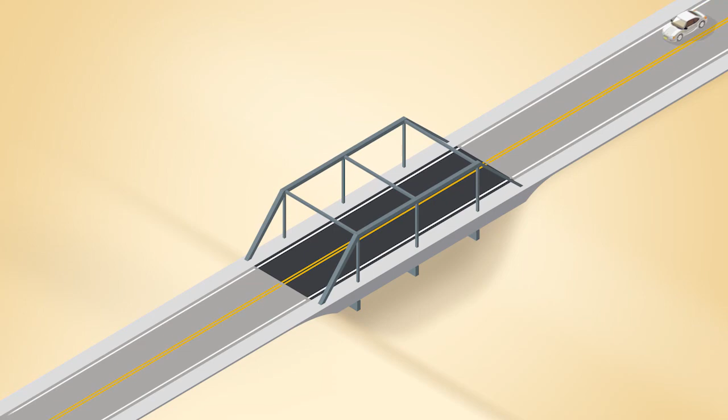As a matter of public safety and as a way of safeguarding vital transportation infrastructure, state and local law enforcement agencies enforce weight restrictions on trucks and heavy vehicles traveling public roads. Under normal conditions, vehicles over 40 tons are not permitted on interstate highways.

Additional restrictions apply based on the legal load combination, a function of vehicle weight and axle spacing. For example, 25 tons is the weight limit for a typical 3-axle truck on an interstate highway, while a typical semi-trailer's limit is 36 tons, and a 4-axle dump truck's is 27 tons. State and local laws may address the legal load combinations allowed on state and county roads by farm vehicles and other types of commercial trucks.

When the drivers of trucks operating within the legal weight limits cross a bridge, they are relying on the bridge owner, whether a federal agency, the State Department of Transportation, counties, or municipalities, to keep the bridge safe and available for their use. All of these bridge owners have critical tasks in common. They need to inspect the bridge for deterioration or damage, determine if changes in condition have reduced the bridge's structural capacity to safely carry legally permissible loads measured by its load rating, and notify the public of any weight restrictions.

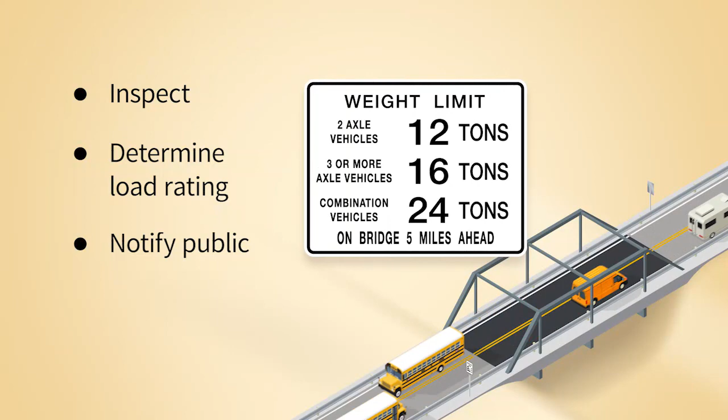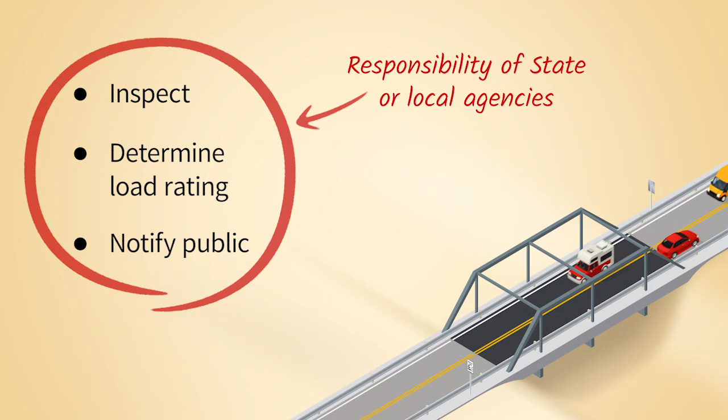The responsibility for restricting loads on local bridges may fall on state or local agencies, depending on agreements between each state and local governments it serves. Here, we will review how load ratings are determined and the best practices for posting truck weight restrictions.

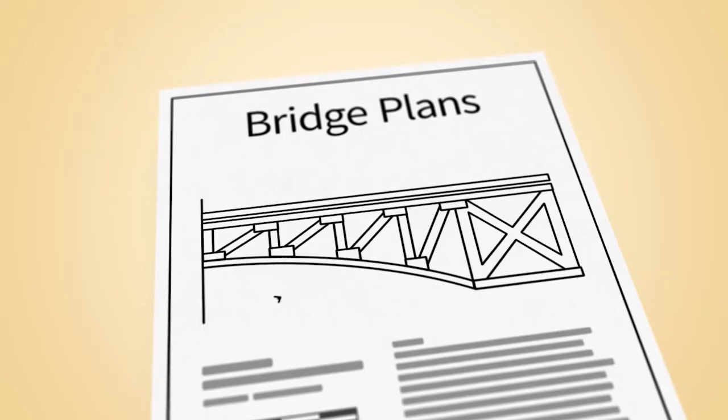Before a bridge or culvert is constructed, an engineer designs its structural elements to have capacity to meet anticipated use. After construction, and as part of every bridge owner's responsibility according to the National Bridge Inspection Standards, a bridge is inspected once every 2 years. The inspection report documents any deterioration or damage that might reduce capacity and may recommend an updated load rating analysis.

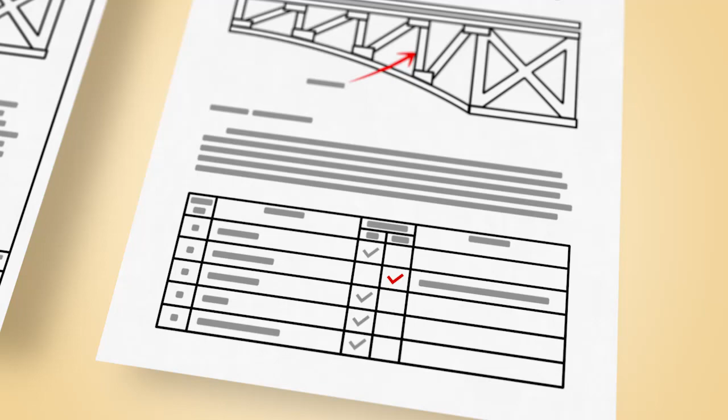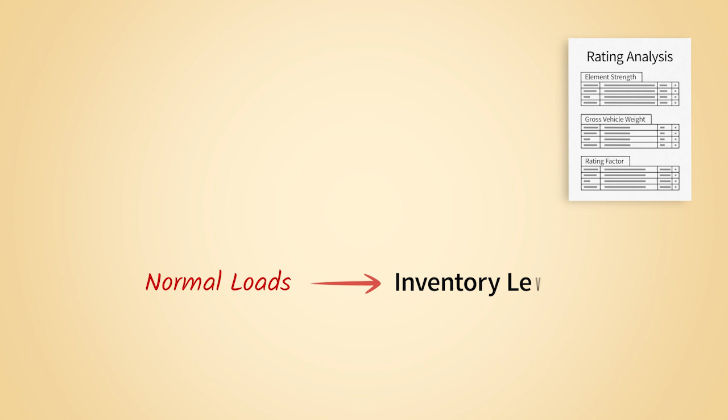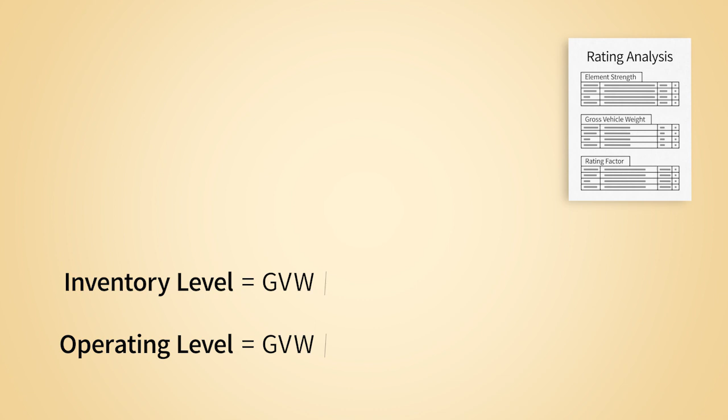By considering various loading patterns and associated uncertainties, a rating analysis is developed to determine the truckloads that the bridge can carry safely on a regular basis, called the inventory level, and the maximum permissible loads on the bridge, called the operating level. Both ratings can be expressed in terms of gross vehicle weight and as a ratio of gross vehicle to legal weight, or rating factor.

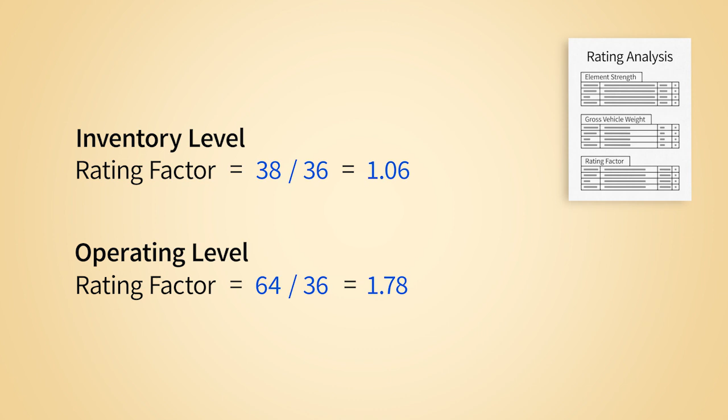For example, for semi use, a county bridge may have an inventory level rating of 38 tons and an operating rating of 64 tons. As the legal weight for a semi is 36 tons, the rating factors are 1.06 and 1.78 respectively. When the operating level rating factor is less than 1 for a given legal load combination, it no longer has the capacity to carry that full legal load.

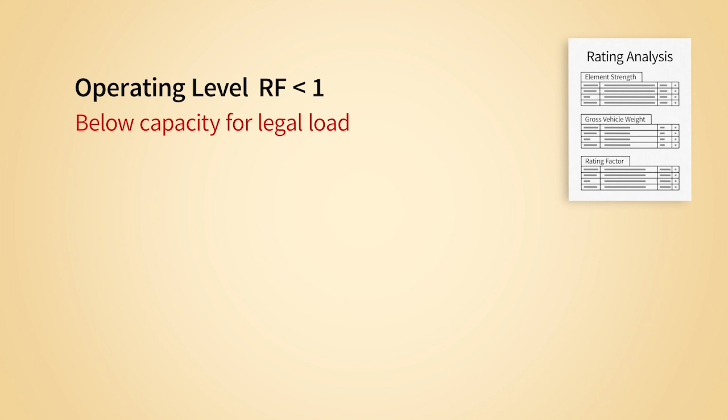As this puts the safety of drivers at risk, the bridge owner must restrict truck weights, often through a load posting, until such time that structural capacity of the bridge is restored or the bridge is no longer able to carry traffic. When the operating or inventory rating of a bridge is less than 3 tons for any vehicle, the bridge must be closed to all traffic.

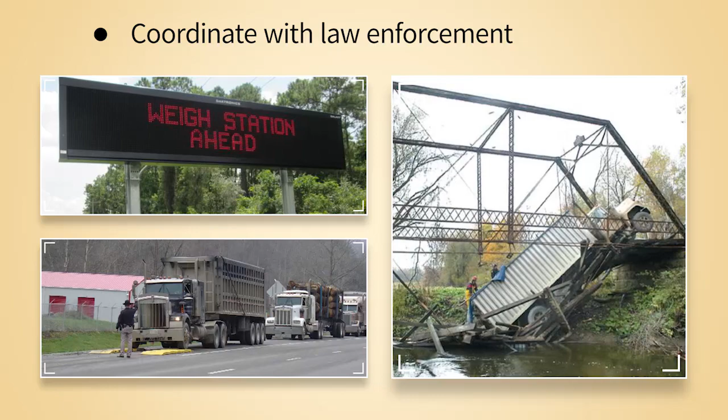Like other black and white roadway signs, the weight restrictions posted at a bridge are legally enforceable. Coordinating a posting with law enforcement is an effective method for ensuring appropriate use of the bridge and safeguarding public safety. The loss of access to a bridge or culvert may disrupt farming or commercial activities, so agencies responsible for posting restrictions may wish to adopt additional strategies for reducing negative impacts and barriers to enforcement.

For example, agencies can identify and share alternate routes available to heavy vehicles. Use an advanced posting so commercial vehicles can take an alternate route without backtracking. And communicate the new posting and risk of overloading the bridge to the public. Let's see how one bridge owner fulfilled their load rating and posting responsibility.

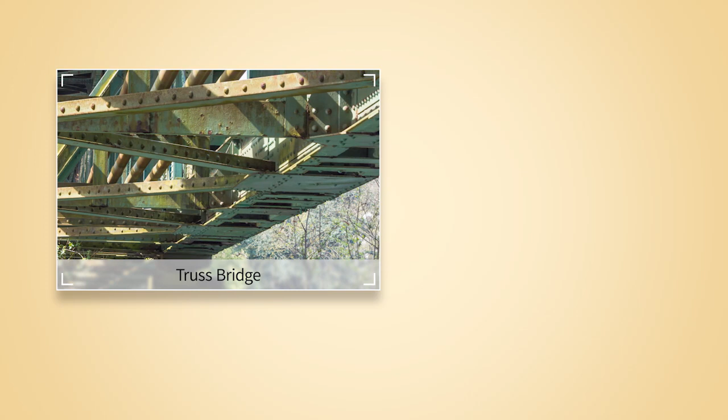During the inspection of a county-owned truss bridge, a certified bridge inspector found a truss member had corroded and lost 15% of its cross-sectional area in a critical location. The inspection report recommended a load rating analysis. The county manager hired an engineering consultant to perform the analysis. During the initial meeting, he explained that the bridge was used by farm tractors with loaded grain carts during harvest time and that their gross weight often exceeded 40 tons, which is allowed by the county.

The engineer incorporated this scenario into her model and found the rating factor for the tractor and loaded grain carts to be 0.85. She recommended restricting maximum weights for this special vehicle type. Use by typical over-the-road trucks was not affected by the load rating. The county manager met with the county magistrate to get a posting order.

Once they could legally post the bridge, the county manager provided a copy of the court order for the county sheriff to encourage enforcement action and directed the installation of a weight restriction sign at the bridge and advance warning signs at the intersections nearest the bridge. As harvest time was approaching, he also identified an alternate route for those farmers affected and posted the route on a popular community poster board at the local farm supply store.

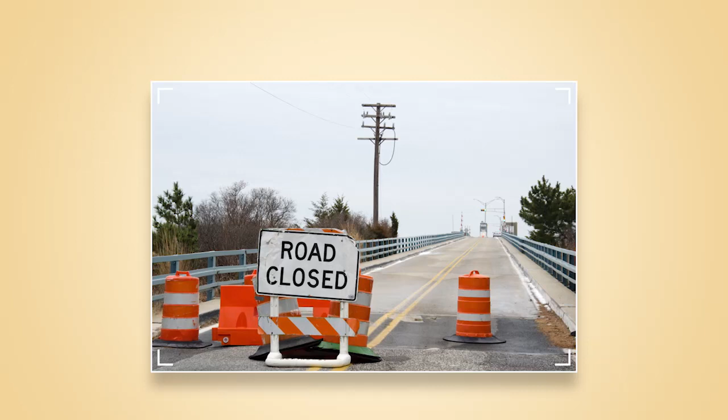Exceeding the posted weight limit on a bridge greatly increases the likelihood of permanent bridge damage and bridge collapse. A bridge that fails under the load of a heavy vehicle poses a serious risk to the driver and the traveling public. In addition to the loss of equipment, the loss of a bridge and the access that it provides can negatively affect the local economy.

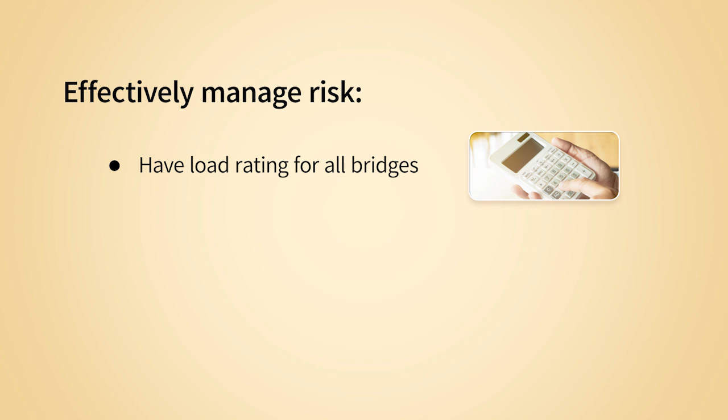To effectively manage the risk of a bridge failure due to overload, a bridge owner must have a load rating for all bridges in their inventory that considers the current condition of the bridge and all legal load combinations. Post weight restrictions at any bridge that cannot safely carry legal loads. And work with law enforcement to ensure weight restrictions are enforced.

As a bridge owner, verify that the load ratings for the bridges in your inventory are both current and complete, and ensure that bridges that can't carry legal loads are appropriately posted. If they are not, contact your State Department of Transportation for assistance.